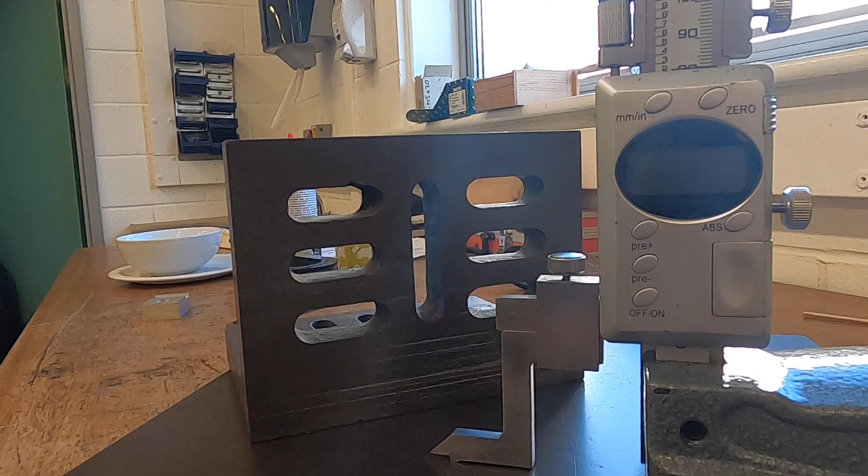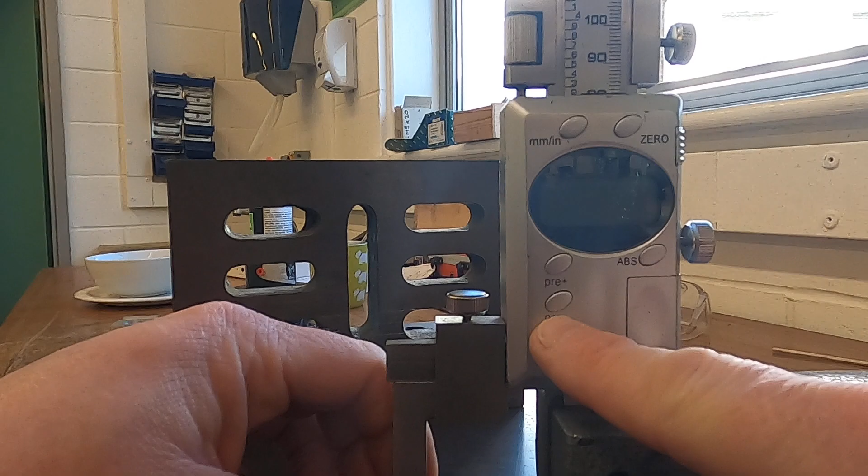So this is my digital height gauge. What this is here is a surface plate, and I've got an angle bracket there, an angle plate there. This digital height gauge here is quite expensive. It's got two different adjusting wheels on it. Turn it on and off there, and you'll see a measurement here.

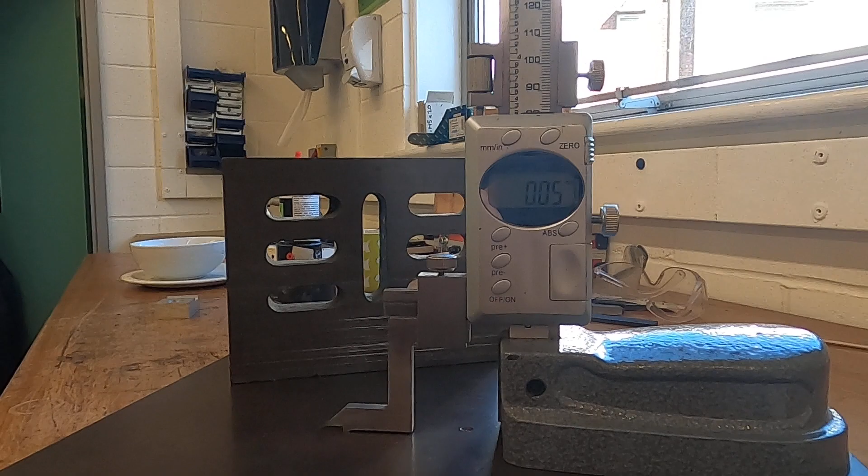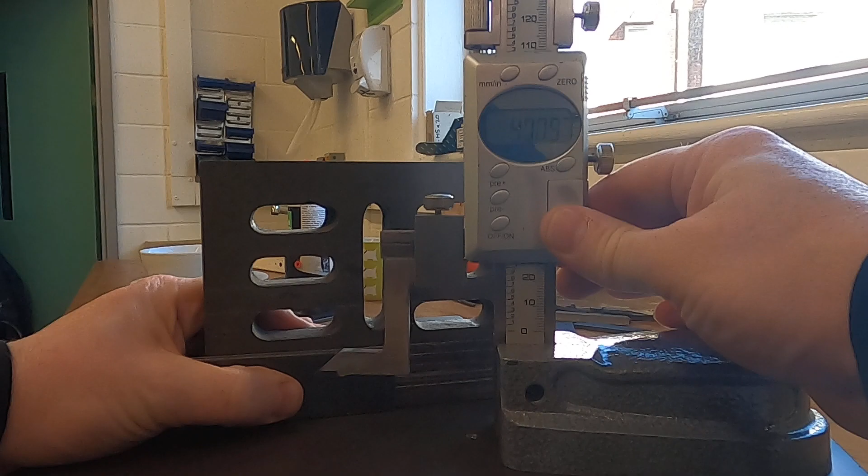That measurement, when that blade there is touching the bottom, get it all in, that's better, has got to be 0. Okay, take your cut and filed piece of metal, bring your height gauge up, make sure it's zeroed, bring your height gauge up and touch it on the top, gives you a measurement, 30.35. Okay, so we want a center line through this, so roughly that's going to be

15.2. Okay, so I can bring that down to 15.4 there. I can tighten the top one, and then I can use this thumb screw here to just gently adjust. 15.19 is fine there, just so it's halfway. And then use the point, the sharp edge of the height gauge there to scribe your line through. Make sure you take it all the way through.

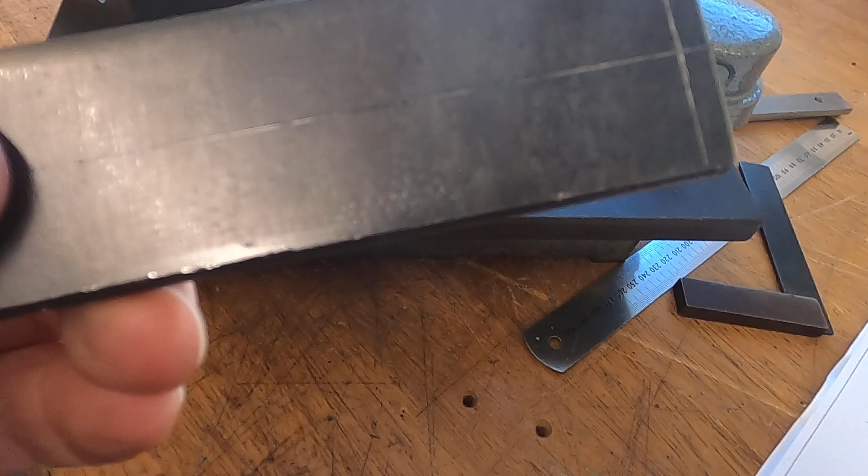All right, let me just turn this back on. So you can see now that I've got a center line, and that is going to be the same as the center line through the middle there. Now on your drawing, you've also got a center line through the middle of that hole there and the middle of that hole there. You could mark those out now as well at this point.

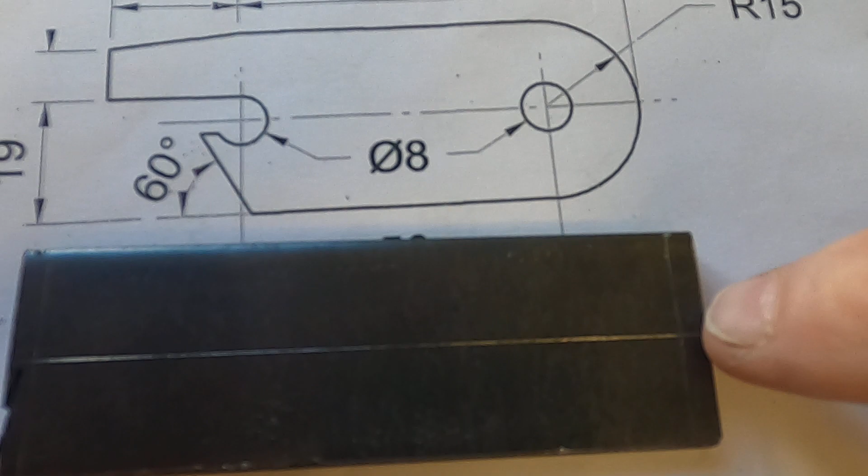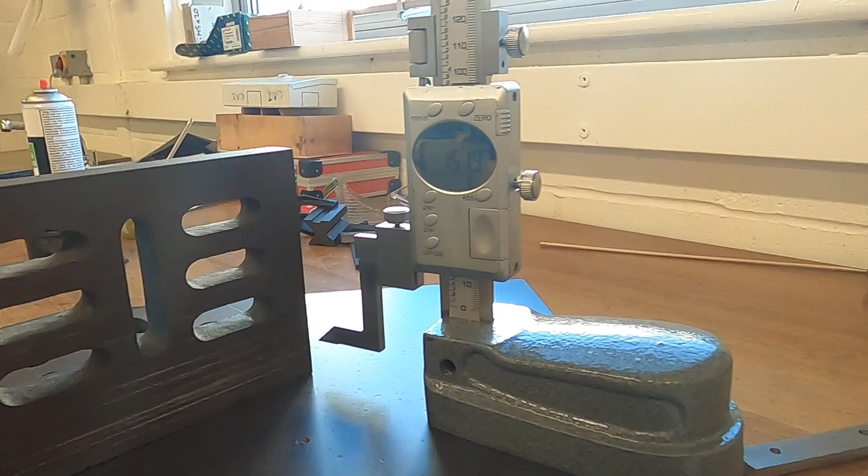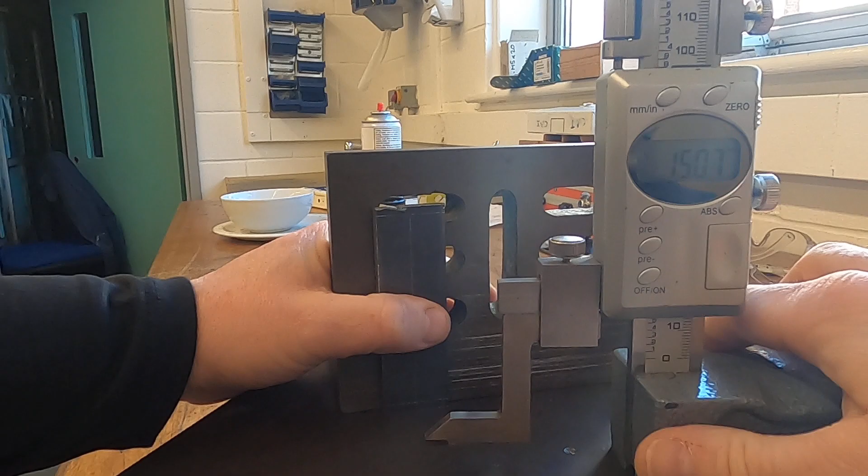So you've got a perpendicular edge there. Excuse this marking out, this is from another piece. We want to come 15 millimeters in and scribe a line. So now that we've got that there at 15.07, but we want the radius to be 15, so we can just slacken that off and just adjust this ever so slightly there, tighten that back up, place my metal vertically there and scribe that line there.

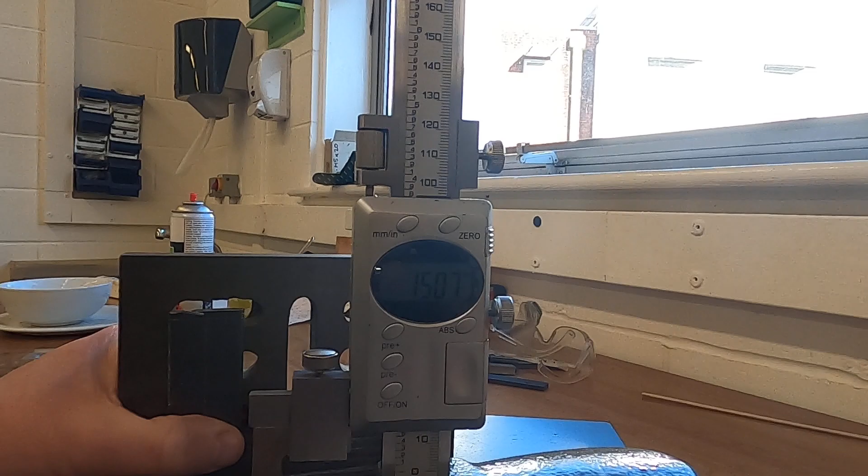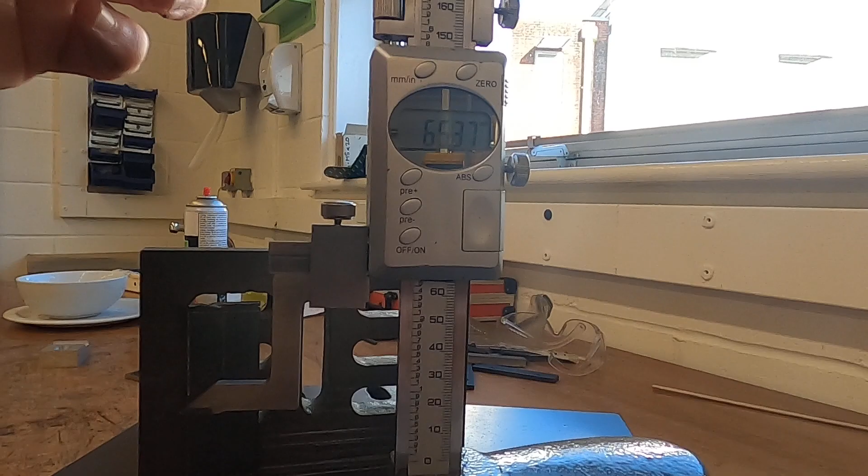Now the drawing also says that the holes are 50 millimeters apart, so if you wanted to, you could add that 50 onto your 15 and you'll get 65. So you can adjust these two here now to 65 millimeters. There, tighten the top one. Let me just check and see that. And then use this thumb screw to just adjust that down to as close to 65 as you can, and then tighten the bottom one there.

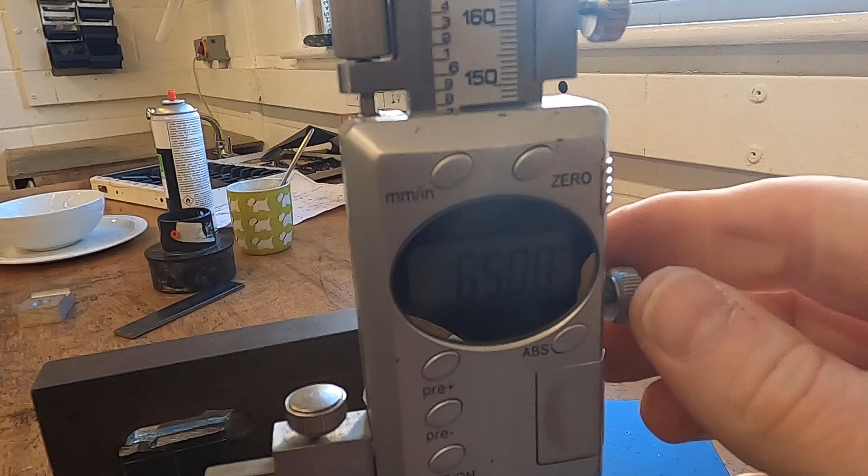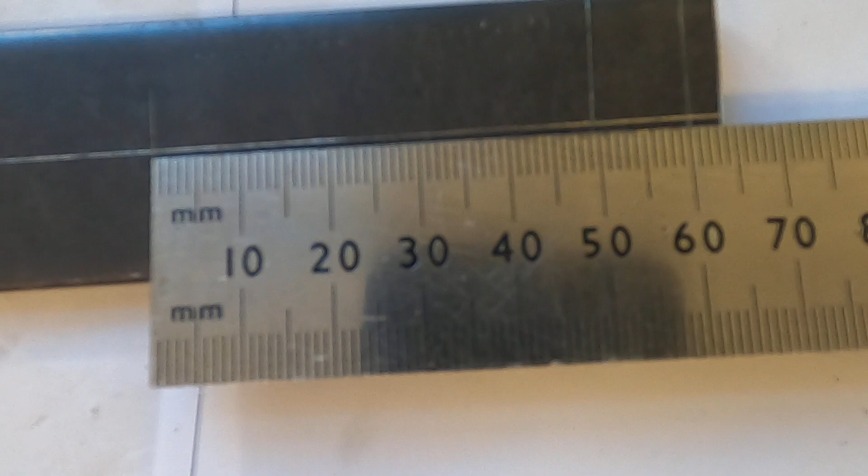Okay, and then what I can do is I can hold that tight up against there and I can scribe that line there. What I can also do then is put my flat down on there and check this with my ruler to make sure that I've got 50 millimeters between the center lines, and then I've got 15 millimeters there and there. Now the next step would be to mark out the radius. We can't drill yet because we haven't marked out our radius.

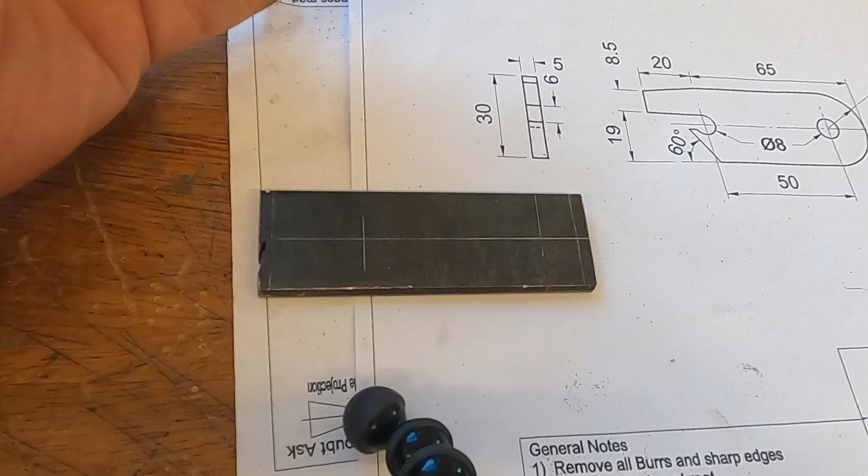So what we need is a little dent for the dividers to fit in, and that little dent there is made with this, which is called a center punch, and this, which you're familiar with, is a hammer. You can put that little dent in there. It's a bit loud. This one here, you're not going to mark the radius on, but you are going to drill it.

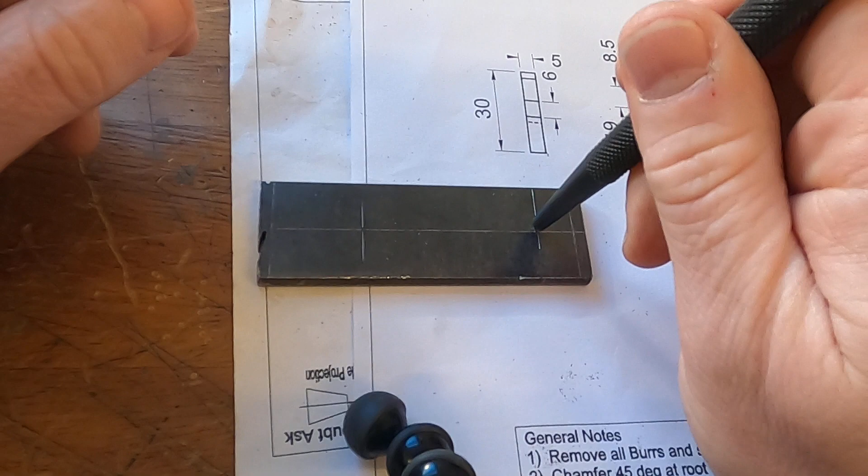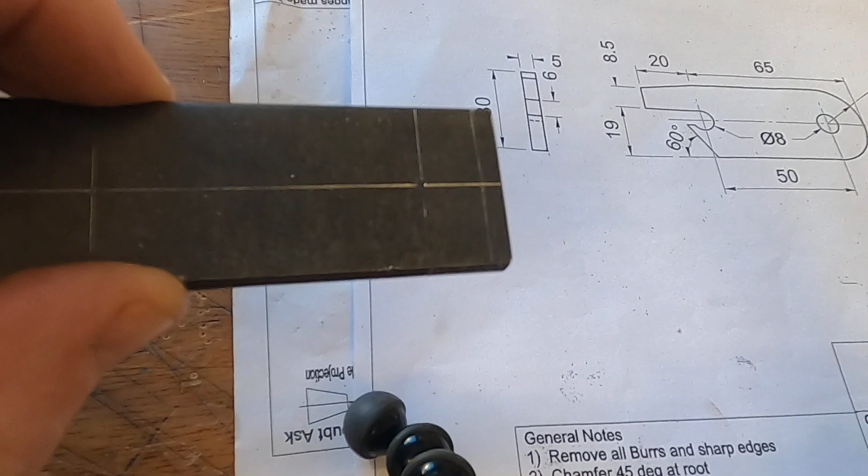And one hit and one hit only. What you don't want to be doing is hammering that so there's lots of little dents all around it and the drill will sit in the wrong one. Don't hit it more than once, just line it up and hit it once, and you should end up with a nice little dent there. That little center punched mark is important, because the drill on metal will skip around on the surface and it could snap. That gives it something to bite into.

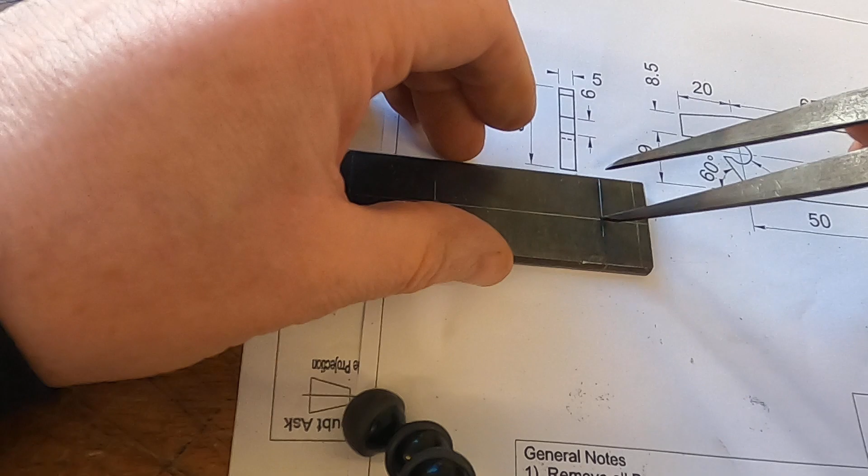Okay, once you've done that, this compass looking thing here is called the dividers. One leg should be sharper than the other ideally. Not essential, but the legs are going to be sharp because you've got to scribe the metal with it. This has got to be set at 15 millimeters. Now you've measured and marked 15 millimeters to the end of your material from that center line there. Just to see that there, and it should be 15 millimeters centered.

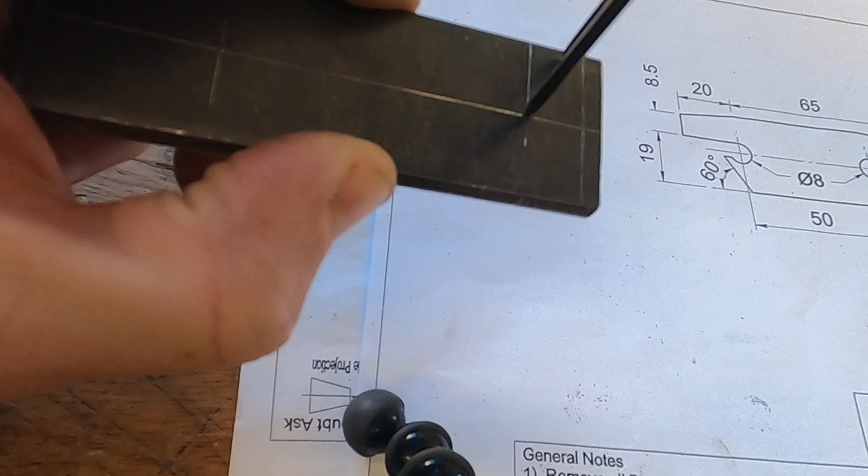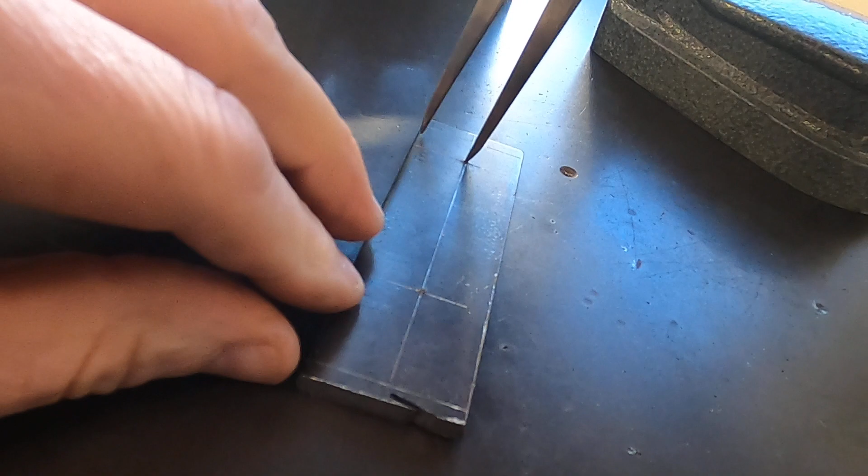So my dividers, look, sits in that hole, and then I can scribe that line around the outside there, okay? What I like to do is put it on a nice, if I can adjust this, a nice slippery surface, so that when my divider leg goes in, I can scribe that line. I don't like to turn the dividers, I like to turn the work.

If you turn the dividers, you tend to twist them, and these aren't very sharp. When you twist them, you tend to adjust the measurement, okay? So you can just about see, sorry about the bell, you can just about see my radius on there. I'll get a sharper one and I'll do it again now. Once I'm done with that, I'll file the radius on that, and I'll do a little video on that now.